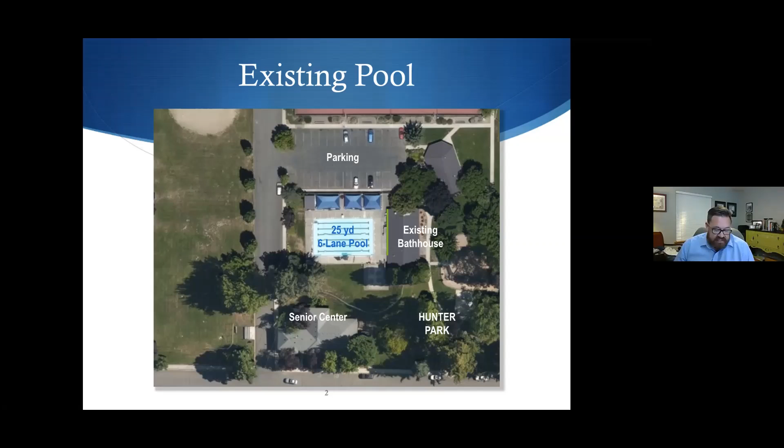was that people are looking for a larger pool within the community. They're looking for something along the lines of a 25-meter by 25-yard pool with depths that are able to accommodate more uses like diving starts for swimming, water polo, and just general recreation, and large enough to accommodate multiple uses at the same time, multi-generational and multi-purpose programming, so that we could have different things going on at the same time with groups that generally don't mix together, where the pool now is so small that we don't generally have many different things going on at the same time. A larger pool would allow different groups and a multi-generational group to use the pool at the same time in different areas.

And the pool ad hoc committee did also get from the community that the community was worried about funding, and they did want the funding to have a minimal impact on the taxpayers. Now, if you recall, previously we did recommend that we pay for this pool project through food and beverage, which is a tax that comes to us through people eating out within the city of Ashland. And the way that we were looking at funding it before actually did not have an increased impact on the taxpayers of Ashland.

Another thing I wanted to mention was that from the survey, some observations were gained. And some of those observations I just want to mention to you were that 60% of the community members use aquatic facilities in the area. Our community members generally have a desire for multiple use options, like I talked about just a few minutes ago. And there is a desire generally among the citizens of Ashland for an improved selection of aquatic options.

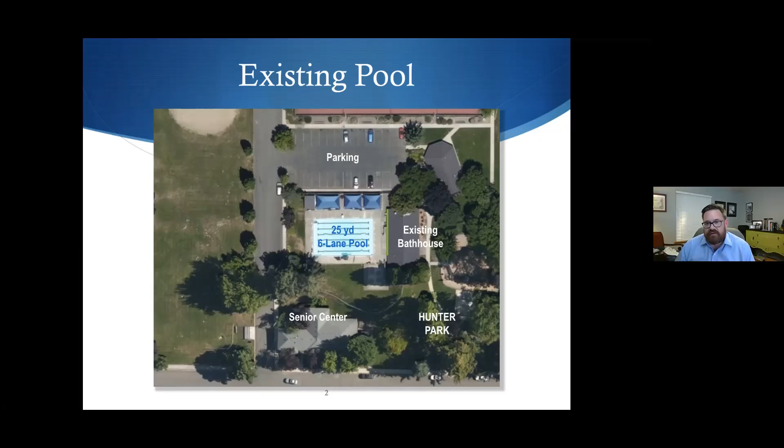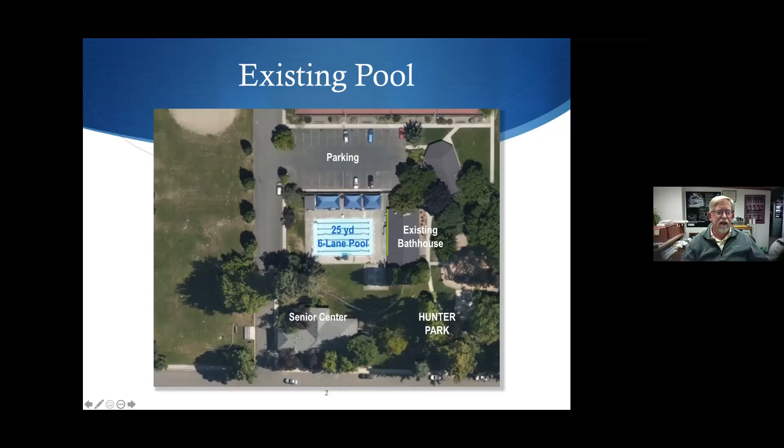I'm going to take you through the design concept at this point and walk you through some of the key features that came out of the recommendations and were the basis of the study that we've conducted. The replacement pool is basically a 25 yard by 25 meter pool. That's the goal. The depths that we're looking at range from 3'6" to about 8 feet deep. The recreation therapy alcove that Michael mentioned would be about 2 feet to 3'6" in depth.

A 25 yard by 25 meter pool should yield about 10 lanes wide at 25 yards in length, and going in the other direction, 7 lanes at 25 meters. Of course, you can't swim both directions at the same time. The pool should also yield a water polo course with a uniform depth at around 7 feet throughout the course, which would make it a small but compliant regulation water polo course. And steps and ramped entry are key features of any modern pool, providing better ease of access.

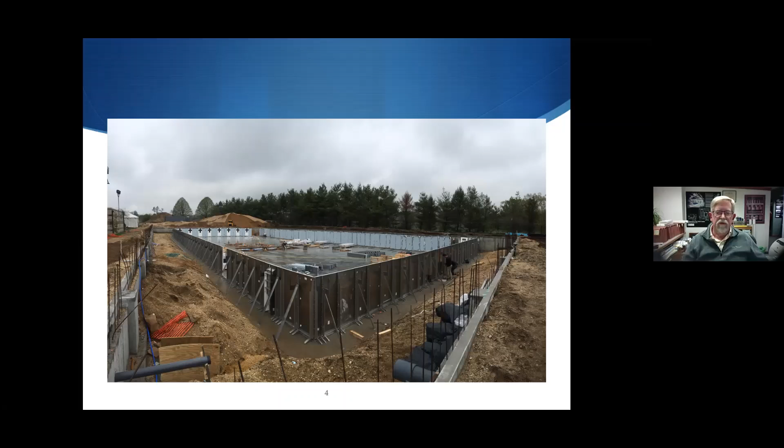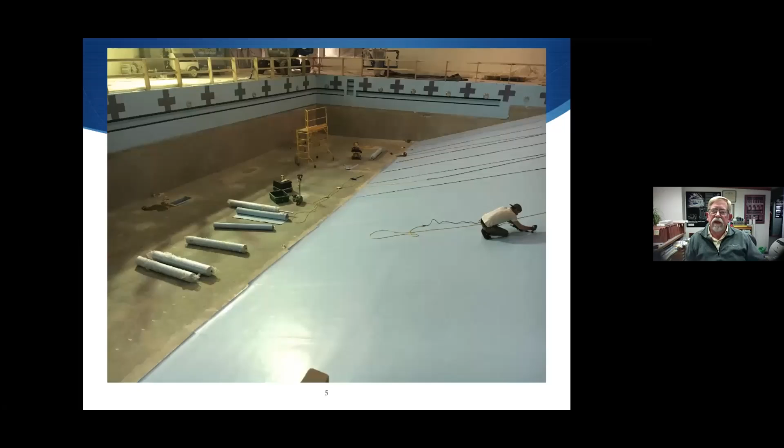When we were commissioned to do this study, we were also directed to look at the Myrtha pool construction, which is a proprietary pool system constructed of PVC coated stainless steel panels that are erected on a concrete base, with a 25-year warranty and a long-term finish that would yield good, easy maintenance over time. The concrete floor of a Myrtha pool is then covered with a PVC coating that is bonded to the PVC attached to the stainless steel panels for a complete watertight modular system.

The other project components that will comprise an updated facility, in addition to the new pool, would be a new pool heating system, water circulation, pumps, and water filtration and sanitation. All would be replaced because, with the larger pool and greater volume, none of the existing systems could really be reused due to their size and age. We'll need some site improvements to increase the buildable area of the property in order to fit the larger pool. This results in reconstructing the south edge of the parking to the north, and we'll cover that briefly.

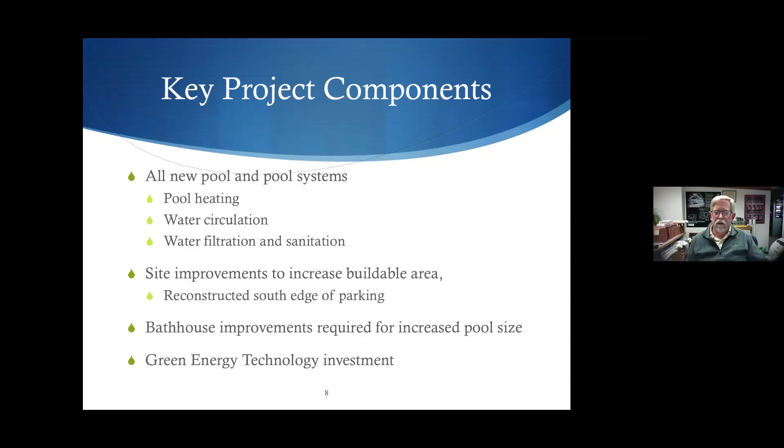There also will be some requirements for improvements to the bathhouse as we increase the pool size. The number of toilets, sinks, and showers are driven by the Oregon Health Authority requirements for swimming pools, and we will need to increase those in the bathhouse. And then lastly, there's a component driven by a state of Oregon mandate for using 1.5% of any public construction budget for green energy technology investment, and I'll cover what those are as we go through.

The site development will require revising the parking lot to the north. The yellow rectangular box around the parking lot is the size of the existing parking lot. It's a bit oversized, so we can steal about 14 or 15 feet along the south edge, move the south row of parking north a little, and still have a completely legal regulation parking lot without losing any spaces, but gain quite a bit of space to enable expansion to the north for the pool. The other yellow rectangle is the existing 6-lane 25-yard pool.

And so you can see we're talking about a much larger pool that would expand significantly to the north of the existing pool and to the south of the existing pool. In order to create that new site area, the north edge, as it meets the parking lot, and the western edge would be comprised of retaining walls, much as there are some there today, in order to expand the site area out to the north and west to create more deck space and room for the larger pool.

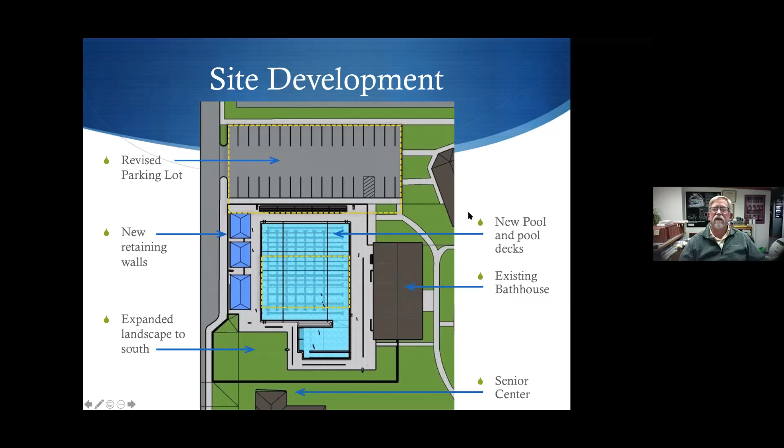In addition, we would expand to the south towards the senior center, creating a new fence line and leveling the area between the two facilities in order to create more outdoor seating, lawn space, more recreational leisure space around the southern edge of the pool, where the shallow water area would result. And then the existing bathhouse, of course, we mentioned will require some improvements. A little closer look at the pool itself.

The space at the north of the pool would still accommodate some bleachers along the northern edge, and the 25-yard swimming would be in the east-west direction as it is today, same configuration. And as you can see, we can get up to 10 lanes wide, some of which start to get shallower towards the southern end of the pool, but at least 6 to 8 lanes of water that can have a dive start either from the west edge in the 25-yard configuration, or from the north edge in the 25-meter configuration.

We would have adequate space on the west of the pool to relocate the existing shade shelters, provided we could create that retaining wall that was mentioned earlier. And then the shallow water pool would be an extension of the shallow end of the 25-yard by 25-meter pool, being about 3.5 feet deep at the point where the two pools meet, and then getting shallower towards the steps and ramp in that area. And we'll get a closer look at that in a little bit.

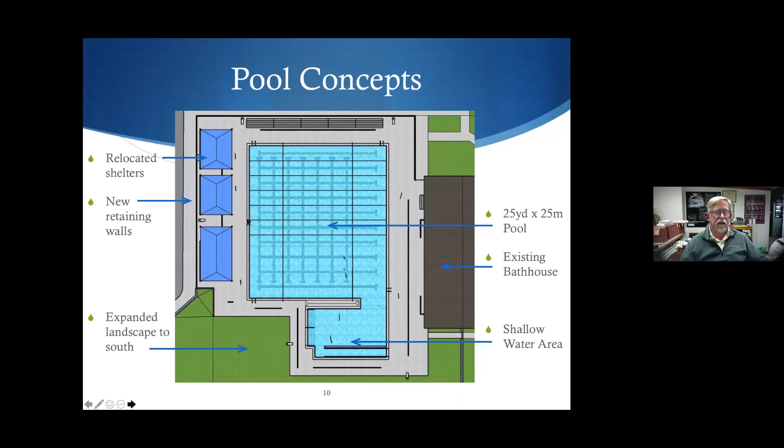Within the bathhouse, the requirement will result in more toilets, the need to reorganize the showers to get private ADA accessible stalls, some private shower stalls in both men's and women's, added toilets, and more sinks. But all of that appears can be done without encroaching significantly on the changing area within each of the locker rooms. That is, when we get to the budgeting, it's dealt with separately from the pools, so you'll see what the impact of that is as well.

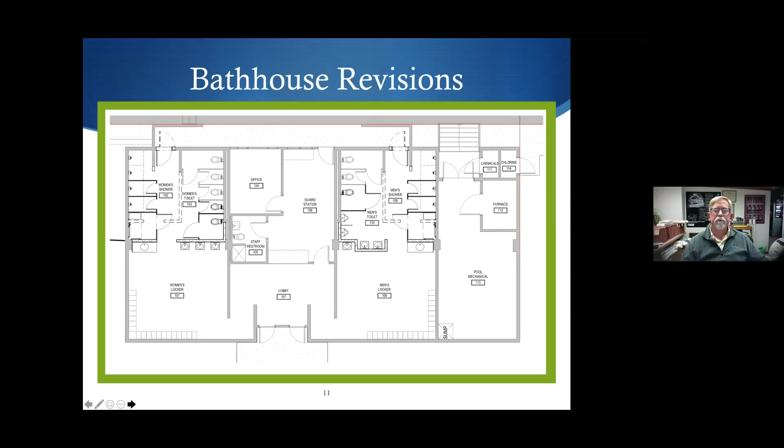Okay, well, looking at the challenge of getting this larger pool onto this site, so the area that we put my little pointer on here. This row of parking, as I mentioned, is moved to the north, which is in this direction. And we're showing the retaining wall along the western and northern edge of the pool with a fence on top of that. So it's an elevated deck similar to the relationship the parking has to the pool deck now. It's just extended further to the north.

You can see how the depth contours work from the shallow end of the southern edge of the 25-meter direction, 3.5 feet deep at that wall, moving down to 5 feet deep before it can then go deeper at a faster rate to get the deeper water at the north end of the pool. The pool itself with the Myrtha system allows the gutter system to be a rollout type gutter where the water is essentially level with the deck of the pool, making getting in and out of the pool much easier.

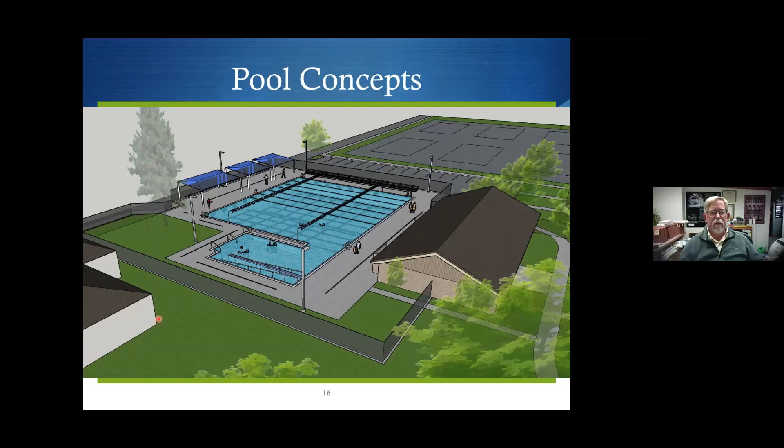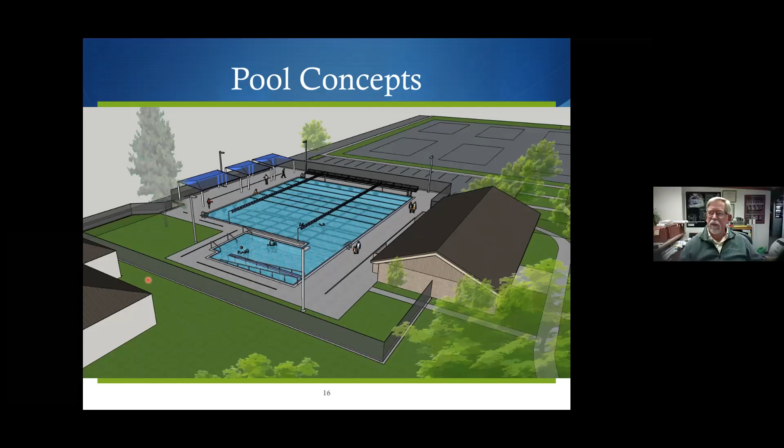There may be some grade elevations to deal with. As we tend to level this area off, we may be slightly higher at the senior center, so that fence might sit on a short retaining wall in order to accommodate the grade difference. But beyond that, there's no need to do any kind of structural changes to the senior center because of this plan, only if we got very close to it. Yeah, which we don't plan to. Stay away from the angle of repose for the footings, so we don't cave it in. Okay.

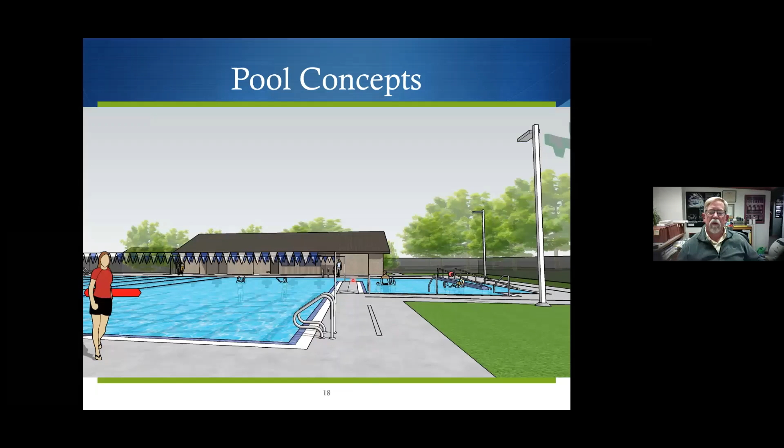This view at the southwest corner of the pool deck shows you the steps going down into the shallow end of the shallow water alcove and the 3.5-foot depth that's along this edge of the 25-meter length, which runs this way. And this is all shallow water that ranges from 3.5 feet deep to 5 feet deep. And that's a requirement of not exceeding a certain slope on that pool area from the shallow end. Once we hit 5 feet deep, then we can drop at a much faster rate into the deep end.

So these lanes would certainly not be suitable for dive starts and competitive swimming, but 6 to 8 lanes would be able to do that in the 25-yard dimension. This also illustrates what Michael was talking about earlier, that you can have lap swimming going on or even a swim meet going on and still have shallow areas of the pool available for other kinds of simultaneous programming. Larger pool allows for that.

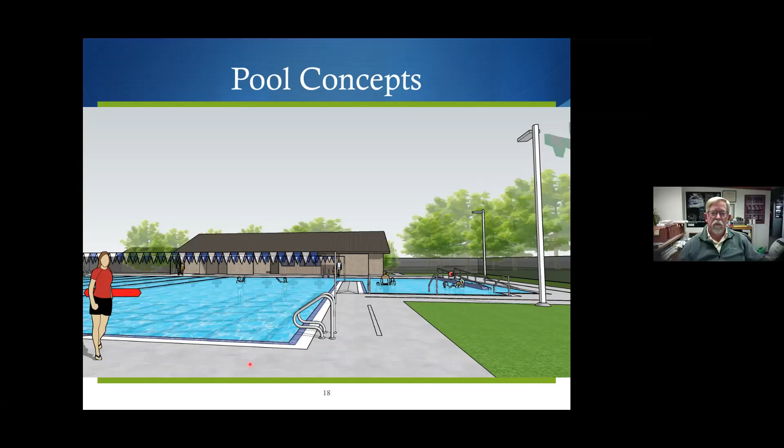And then finally, the overhead view from that area. In terms of the amount of programming that is feasible for the size of the pool, the total square footage of water surface area here that we're planning is about 7,200 square feet. The existing pool is just under 3,400 square feet, so more than twice the surface area in this configuration. And with the deeper depths, more than twice the pool volume as well.

This also illustrates the location for the shade structures on the west side of the pool, giving good shade during a good part of the day. The low sun angle will come through there, but these shade devices could also be equipped with drop-down screens when the sun angles get low in the late summer days.

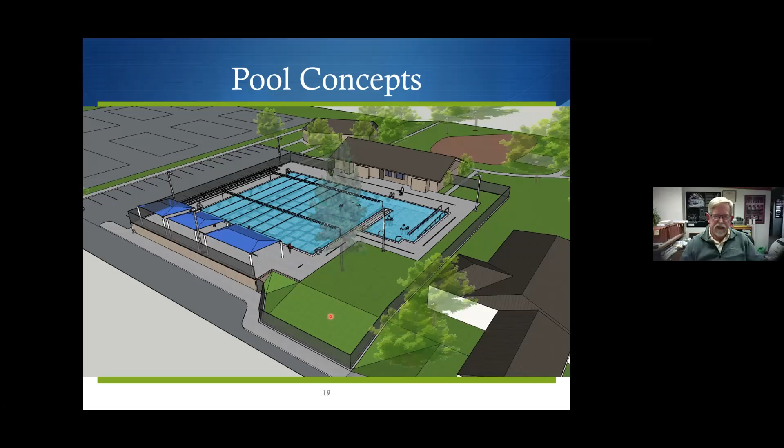So that's kind of a brief synopsis of the design, but there are other considerations that we've looked into in the course of the study, and not the least of which is operating a pool in the outdoors on a year-round basis.

The existing facility was originally designed as a seasonal facility. The bathhouse used to be an open-air bathhouse, but has since been closed up and provided with a furnace and some insulation in order to allow the bathhouse to be used on a year-round basis. But the pool itself has been operated both in the summer and throughout the winter to accommodate the need within the community. So the assumption going forward with this plan is that we would do much the same thing.

The pool water heating can be the most significant operational cost, depending on staffing levels and depending on the selection of the type of pool heating system and the fuel source. As we looked at this aspect of the design, we wanted to make sure, one, that the equipment that was desired would fit within the bathhouse or the pool mechanical room, or have some location on site to accommodate it, but also to address what potential operating costs might be. So we looked at these three plus options.

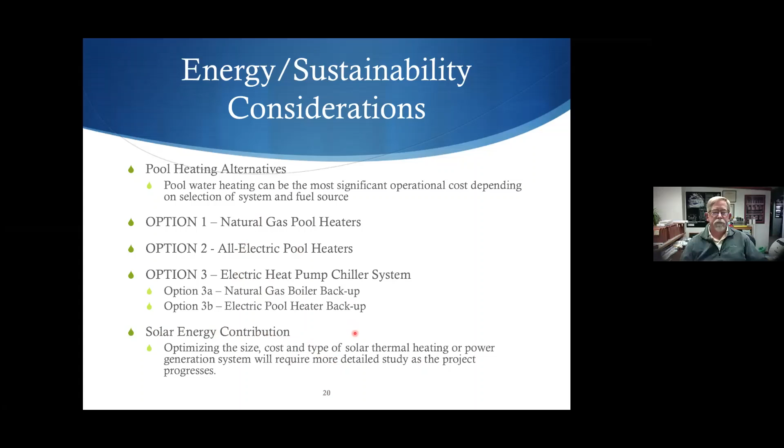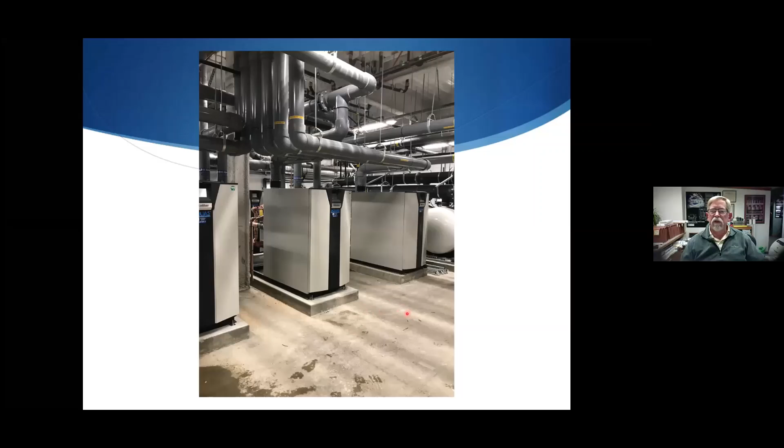The types of systems: this happens to be gas boiler units. The electrical ones would be a similar size and located within the pool mechanical room. So options 1 and 2 would have equipment similar to what you see in this photograph. A heat pump chiller unit looks something like this. This is one that's being installed up in Eugene at Echo Hollow Pool as part of a renovation there. It will be backed up by the existing gas boiler that's been in operation since the pool opened in the late 60s.

And the unit requirements for Ashland would not be quite this large, probably 6 or 8 of what you see as the chillers there. But it produces heat that interfaces the hot water system with the boiler system. The boiler is a backup. So that can all be working together.

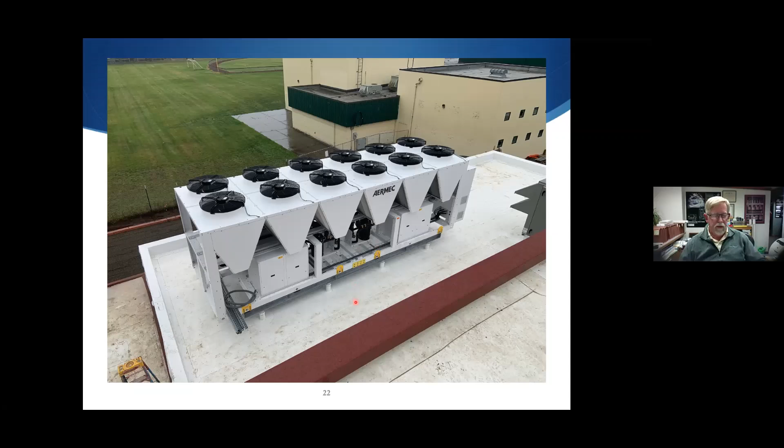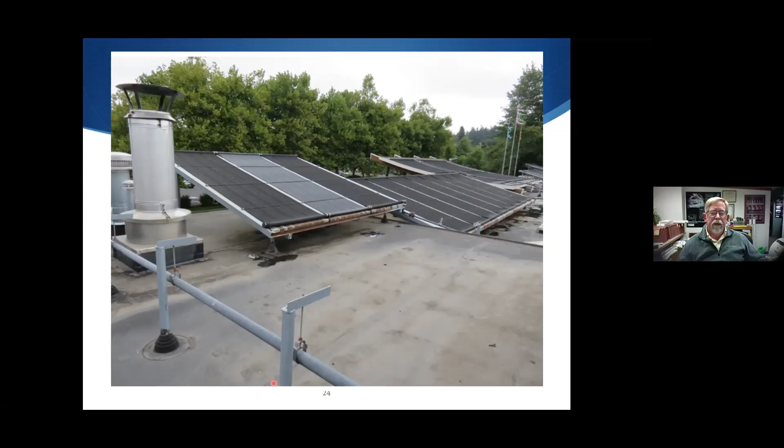Solar hot water or direct solar would look something like this. This is at Amazon Pool, also in Eugene. They also have a hot water system at Sheldon Pool, located in Eugene. So both technologies are eligible for spending with regard to that green energy technology. So the analysis for all of these enters into not only operating costs, but eventually into some of the upfront capital costs as well. So I wanted to take a moment to go through a little bit of detail.

So here's the 4 options: option 1, which is the natural gas fired pool heater. Option 2, which is the all electric pool heater, which would require an upgrade of the electrical service to the building to get a 1400 amp 480 volt electrical service to run all of that. The heat pump chiller unit would also require an electrical upgrade, but only to a 600 amp 480 service with a new backup gas fired boiler. Option 3B would still require the electric, but it would be the 1400 amp service because the electric pool heaters that would be backing up the heat pump would require those at peak load.

So those 3 different systems using 2 different kinds of fuel sources translate into, in order to meet a peak capacity of about 3 million BTUs per hour and a total yearly load of over 8.6 billion BTUs, would require, under option 1, about 90,000 therms. Under option 2, here's the electrical power load. Under option 3A and B, there's the electrical power load for the heat pump. Under option 3A, there's the gas requirement for backup, and option 3B, the electrical requirement for backup.

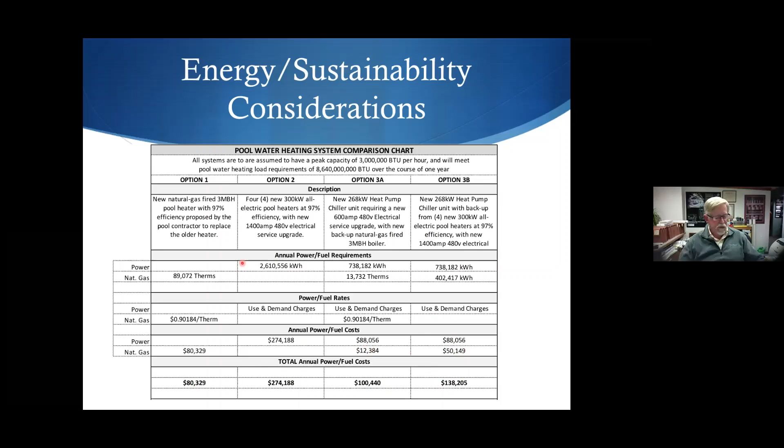As we carry those forward, as I mentioned, not all things are equal; there are costs associated with the differences in these options. Option 1 is built into the cost estimate at this point that we'll share in a minute. So it's got zero cost added to accommodate the natural gas system. Option 2, the all electric, would require slightly more expensive heaters, as well as an electrical upgrade of a significant size. So the added capital costs are a little over $100,000 there.

Option 3A and 3B, you see, are significantly higher costs in terms of the heat pump equipment itself, in addition to having to upgrade the electrical service and buy the backup systems for those as well. So those capital costs are one-time costs. Now, in the case of option 1, this is gas-only heating. There's a move away from using fossil fuels. That's one of the reasons why the city of Eugene has gone to these heat pump chiller units.

I know the city of Ashland has talked about the greenhouse gas reductions, and so option 1 might not fit those goals, but it is currently the lowest cost in terms of operating dollars, maybe not the lowest cost in terms of social and long-term community costs.

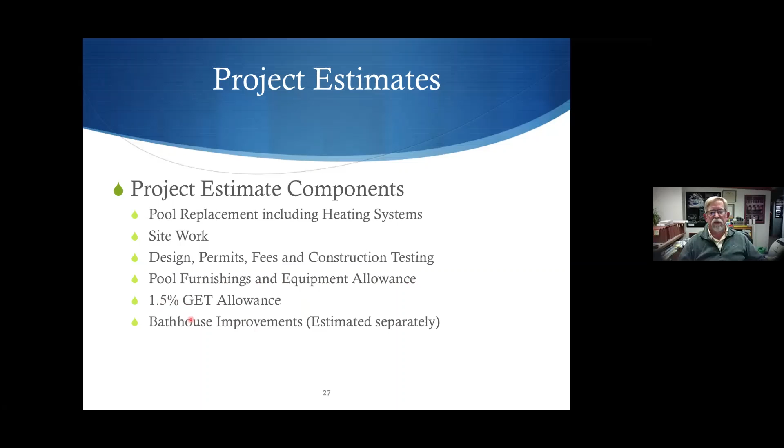It includes the cost of all the site work associated with moving the parking lot, building the retaining walls, leveling the site, making a larger work area, doing all the excavation, and that sort of thing. There are design, permits, fees, and construction testing costs, typically called soft costs. We've got a budget line item for pool furnishings and equipment allowance as well. And then the 1.5% green energy technology allowance that is required to be spent. And then the bathhouse improvements we've estimated separately.

So the cost comparisons are pretty uniform until you add in the pool heating equipment. The pool systems, the site work, design fees, permits, furnishings and equipment allowance, and the green energy technology are the same in all of the options, because we're really only proposing one design at this stage. The options fall into the added costs for the pool heating equipment as we look at these other alternatives, and the net impact on what the overall costs might be as a comparison.

And then the cost of the improvements in the bathhouse, the design, permit and fees associated with the bathhouse, and the green energy technology component would also be uniform across these options. The costs assume prevailing wage rates, as this is a public facility. It does include some estimating contingency, general contractor's conditions, and a fairly low annual cost of escalation right now. Once we pull out of the COVID slump, we'll probably be seeing higher cost escalation rates going ahead, but fairly low at this point.

One potential cost reduction item was evaluated briefly in the report, and that was the value in eliminating the shallow water and ramp area. It came up to only about $250,000 on the surface of things.

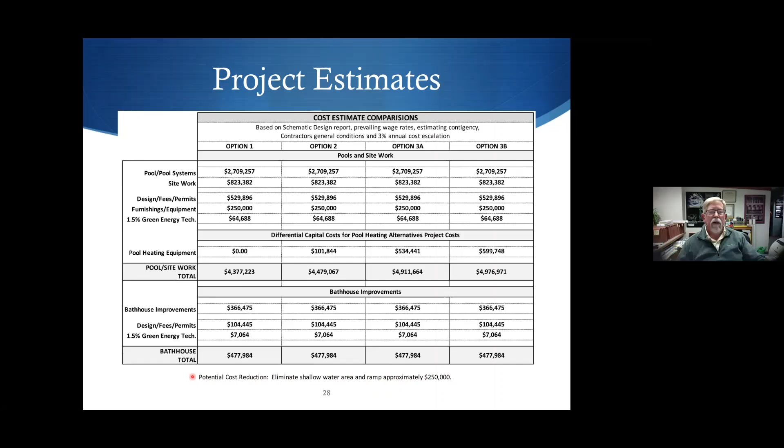Moving ahead, when approval and funding for some concept is ready to go, the design and permitting yet to be done, depending on how different things would be from the concept developed thus far, would probably take about 4 to 6 months. Construction itself, utilizing the Myrtha pool system, should be on the order of 5 to 6 months. Now, those are all subject to the factory that produces the Myrtha and its delivery limitations. The factory shuts down in the month of August, so you can't get anything out of them during that time of year. And it's also driven by the construction season.

What time of year can we begin? If it's down the road a ways, are we going to be working around the pool that's back in operation, and you want to get through the summer season before you start construction? All kinds of questions about that, but it's roughly a 10 to 12 month design and construction process, we believe.

So I think I've talked a lot. I'd like to answer some questions, and I'm sure Michael would too. Okay, so Tara, I'll just go ahead and start reading them and seeing if I can assign them or answer them myself. Okay. So the first question we had, which was you win, Harry, you got the first question in 4 minutes after we started.

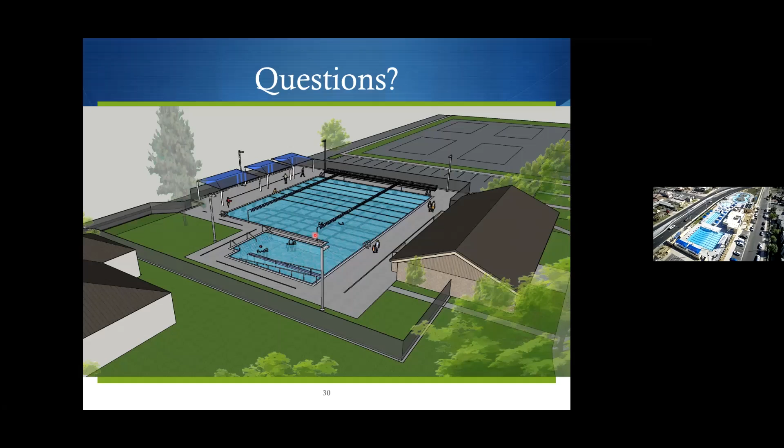Well put. Okay. So there's a question about UV sanitation. We will answer that as we go forward. There's a question about how Eugene uses solar on their pool. We'll be sure to answer that as we go forward as well. Another comment: great presentation, love the design, and a thank you. And that basically gets us to the end of the questions.

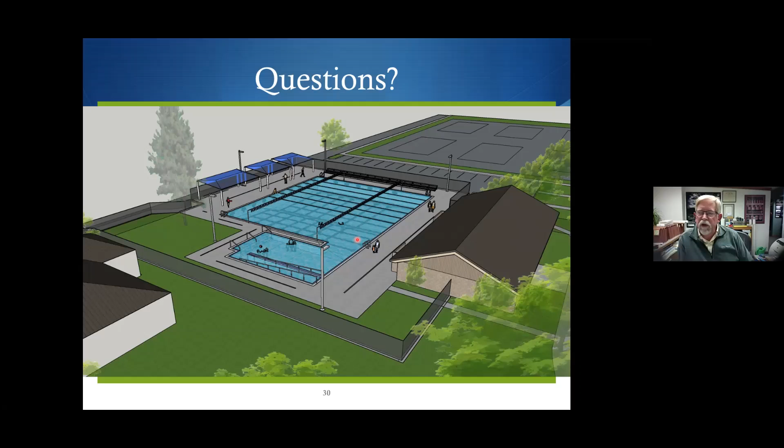Carl, did you want to say anything before I close up? No, other than I think this is a great first step. We put a lot of detail into the study. I would say that the draft report that you have in hand, I need to update with these most recent options 3B and the cost estimates. So that one I'll have to you tomorrow before you can post that. But I'll send this presentation before I leave tonight. Okay.

We did have a couple of email questions, and unfortunately we're over time. What we'll do for any questions that we did not get to, especially these email questions, is we will email you back. The last question I'm going to answer is: is the baseball bathroom next to the bathhouse an option to include in the remodel, possibly to be used as a pump house?

All of the infrastructure around is available to use if it's consistent with the uses that are already there. Now, if we were taking away any part of the bathrooms and degrading the baseball bathrooms for the sake of the pool, that would be more of a problem. But I don't necessarily think the heat pumps are an issue for locating those outside. As Carl showed initially, we can actually locate those right outside on the north side of the building, and they can be surrounded by a fence, kind of a utility area.

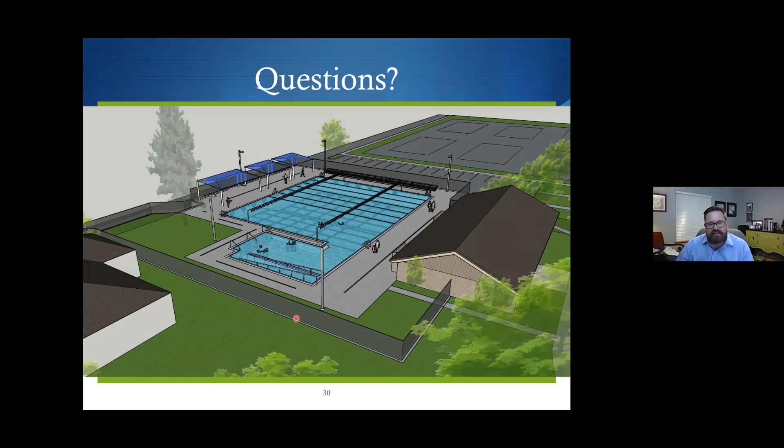Okay, so the last things I wanted to talk about are what the next steps are. But before that, I just want to say thanks to everybody who participated tonight, and thanks for your understanding that this is a process to identify what a new pool should look like in the community of Ashland should we go forward. There's a lot of things that go into making that decision. The fact is that there are a lot of different users, and we need to account for all of those users. First and foremost, this is a community pool, but to me it makes a lot of sense to consider all of the other users and potentially consolidate as many users into one facility as possible to prevent redundant systems throughout the community. And if that's something that we can do as a government agency, I think it's our responsibility to look into that. So thank you again.

The next steps, I'm just going to say really quick, are that we will be presenting this to the Parks Commissioners, and we will touch on some of the things that were asked tonight that we weren't completely able to answer, and continue to have a discussion about this. As far as decision process and how long it's going to take, I imagine that we are going to be talking about this through the spring, as far as discussions about the pool, the heating systems, and all of those things, before the Parks Commissioners approve some form of a plan. And then we will start talking about funding after that. So I appreciate your patience as we move forward in this process.